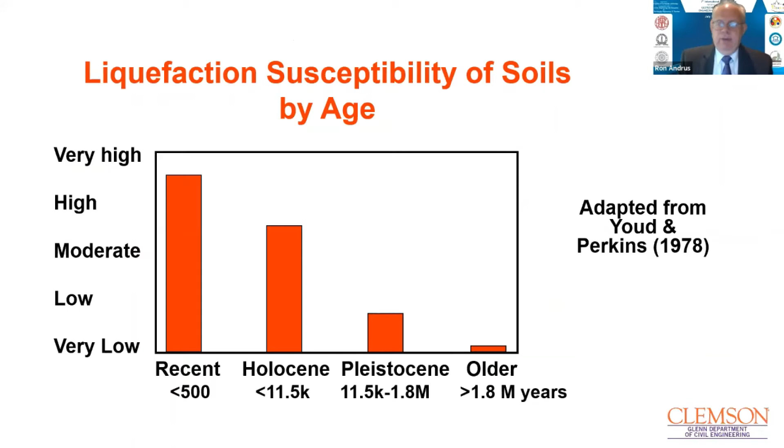But first, I'd like to talk about the aging or diagenesis of sands and just focus on the initial stage, because that is what we generally will encounter when we're talking about liquefaction of Pleistocene or older deposits. The figure I'm showing here I've adapted from Bjørkum, who studied the diagenesis of a Cretaceous sandstone. This is just the initial stage where we have sedimentation, the deposit being formed, and grain-to-grain contacts are initiated. And as we go in this initial stage, we are getting creep occurring at the point contacts of the grains.

The pressures are high, and we will start to get pressure solution at those contacts, followed by precipitation of cement near those contacts. So in this figure, the blackened area near the point contacts is where we're getting cementation. And then as it progresses at those contacts, some of them turn into concave-convex contacts. Factors that are influencing the rate of initial diagenesis include pressure, temperature, and mineral content.

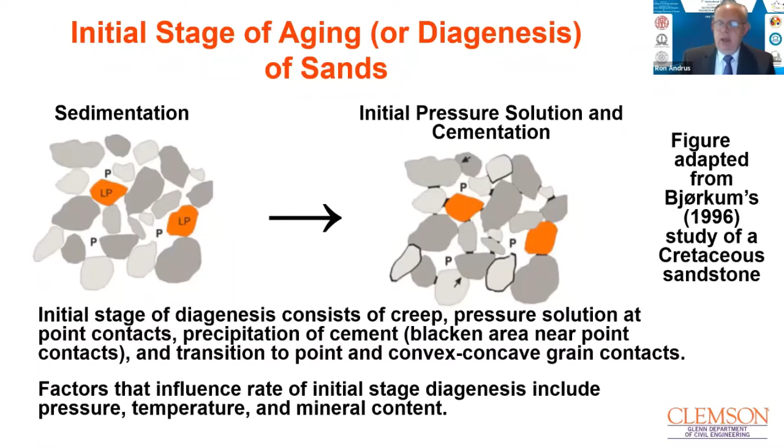Now, what we gain in terms of strength from creep and cementation can be undone by certain events, one being liquefaction. The photograph on the left shows a sand blow or a large sand boil that occurred in a 200,000-year-old beach deposit during the 1886 Charleston, South Carolina earthquake.

Other events that can undo creep and cementation are some construction activities. The photograph on the right is illustrating the installation of a buried pipe that is greatly reworking the soils, and even below the excavated part, the vibrations are weakening the contacts.

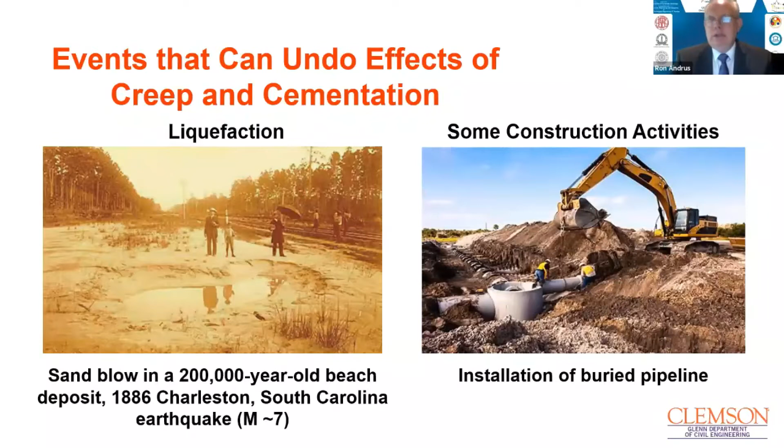Much of our work has focused on the Charleston, South Carolina area, and we see in this slide a geologic map of the greater Charleston area, which shows beach ridges ranging in age from less than 10,000 years to, when we go 40 kilometers inland, over 700,000 years old. Now, during the 1886 Charleston earthquake, there were large sand boils or craterlets or blows, whatever you want to call them, that occurred at many locations within the Pleistocene deposits.

Also mapped are areas where we had horizontal ground displacement. The trace here is the trace of the surface rupture of the fault, and it's actually mostly inferred because it's not well defined. The sediments here in Charleston are 800 meters thick before you get to the basement rock, so by the time it gets to the surface, it's not that well defined. But you can see that, and I'm looking for that cursor again, yeah, most of the ground failures are occurring near the fault.

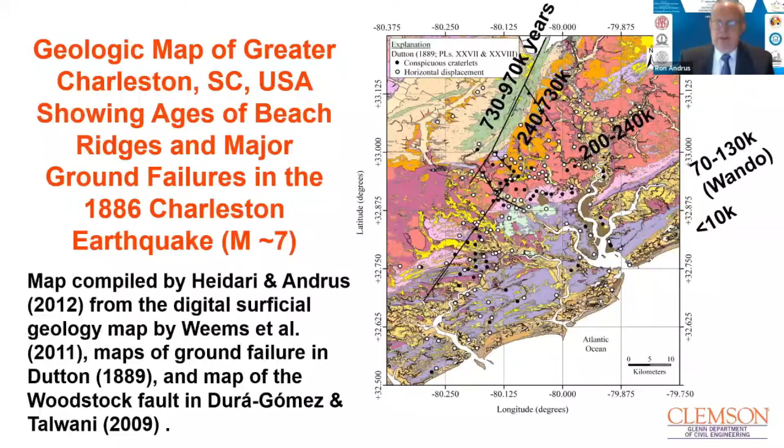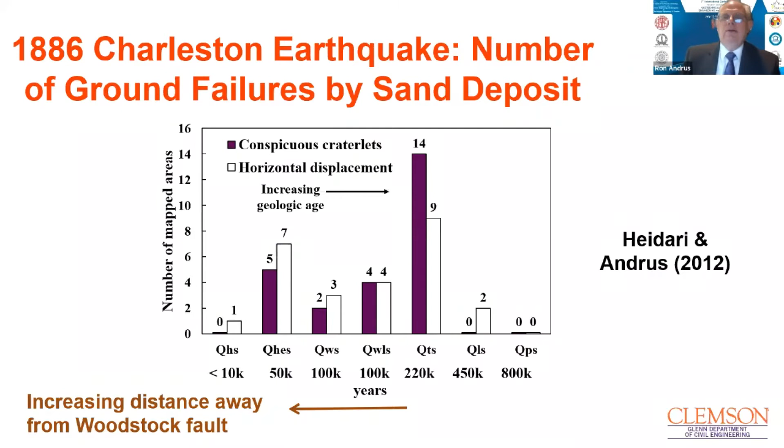The next slide presents a histogram of the number of ground failures in each of the geologic units. This histogram was created by Tihara Heidari, a graduate student here, as part of her dissertation. We see that the largest number of cases are occurring in the 200,000-year-old QTS deposit. And as we move away from the fault, the number is decreasing generally, but still larger in the younger deposits and less in the older deposit. So definitely proximity to the source zone is a factor in liquefying these older deposits.

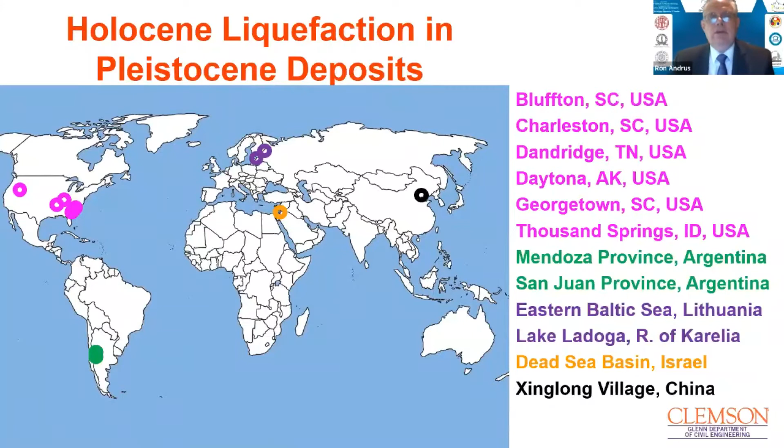South Carolina is not the only place where we have Holocene liquefaction in Pleistocene deposits. Here on the map, we're in South Carolina, but in Arkansas, Tennessee, Idaho, there have been cases of Holocene liquefaction in Pleistocene deposits. Down in South America and up in Europe, the Middle East, and in China, all have reported cases of Holocene liquefaction in Pleistocene deposits.

In terms of quantifying the effects of diagenesis, what we're talking about is we have the CRR from the commonly used charts that have been proposed and are used in practice. But these charts are based on young soil deposits. And so in order to apply them to older soil deposits and to get a correct prediction, we need to apply a diagenesis correction factor, denoted in this presentation as KDR.

There are a number of ways that we can come up with this diagenesis correction. One way is to base it solely on lab tests, where we define KDR as the CRR of the intact, undisturbed specimen divided by the CRR determined from laboratory testing on freshly reconstituted material from the intact. Shown in the figure here are three relationships based on lab tests.

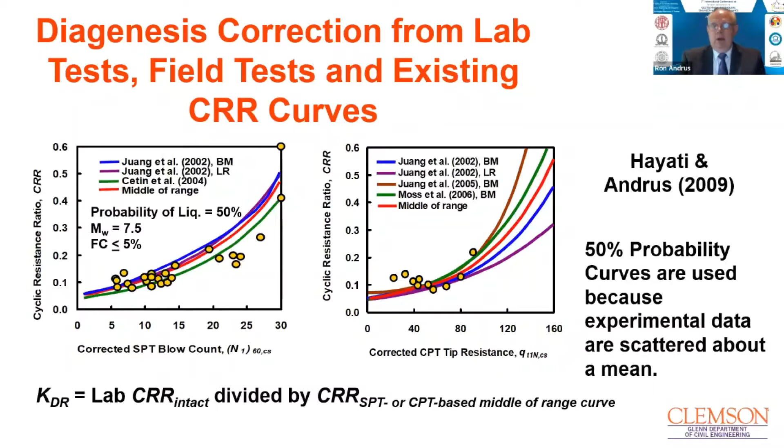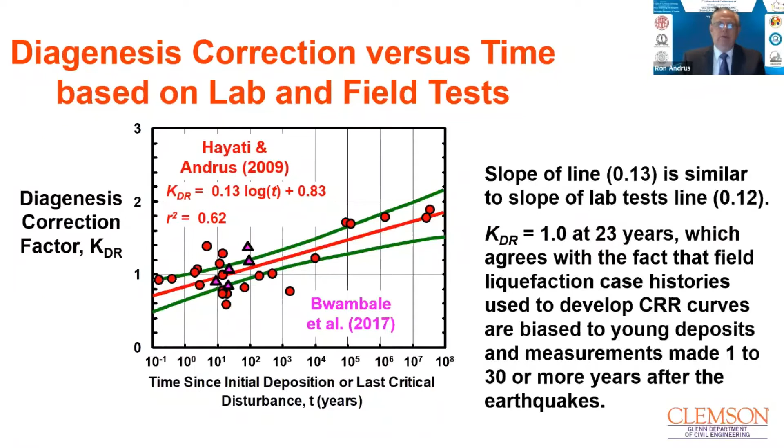The third category of diagenesis correction factors are based on field test and ground behavior observation. There are various approaches within this category. One is to use the liquefaction potential index, another minimum and maximum factor of safety, and a third is to develop new CRR curves. I'm going to highlight each of those three approaches in the following slides.

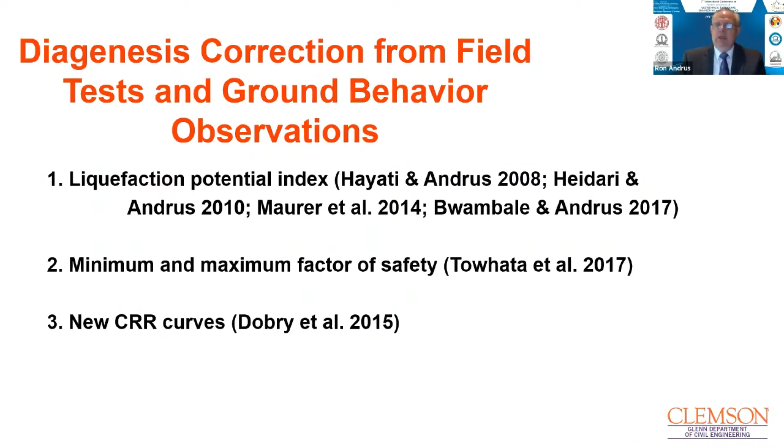And in this example, I'm looking for my cursor again.

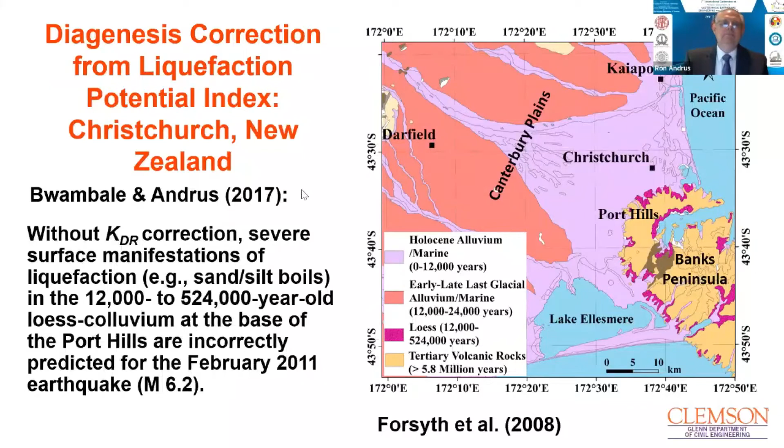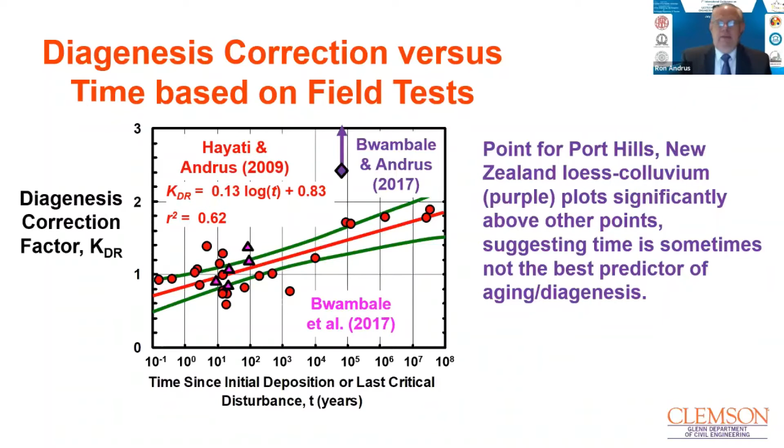When we plot the value of the diagenesis correction for the Port Hills, it plots here. The age range would be in this range right here, but it's well above the data that Hossein Hayati and Barnabas Bwambale compiled for predominantly quartz or silica-based sands. So here's another example of where time is not doing a very good job of being the predictor of the effects of diagenesis.

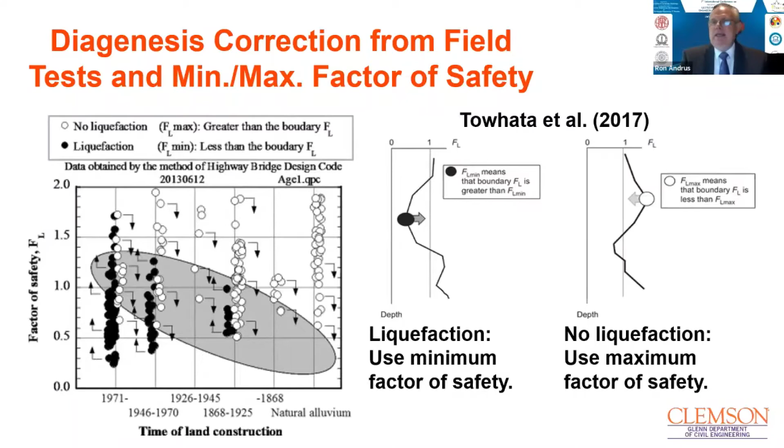Here is a slide summarizing the approach of Towhata and others, where they used minimum and maximum factor of safety. What they did was at the liquefaction sites, they determined what the minimum value of the factor of safety was, and at no liquefaction sites, the maximum. They plotted it on this figure, and it shows that the threshold for surface manifestations of liquefaction, the factor of safety, is decreasing, indicating a strength gain with age.

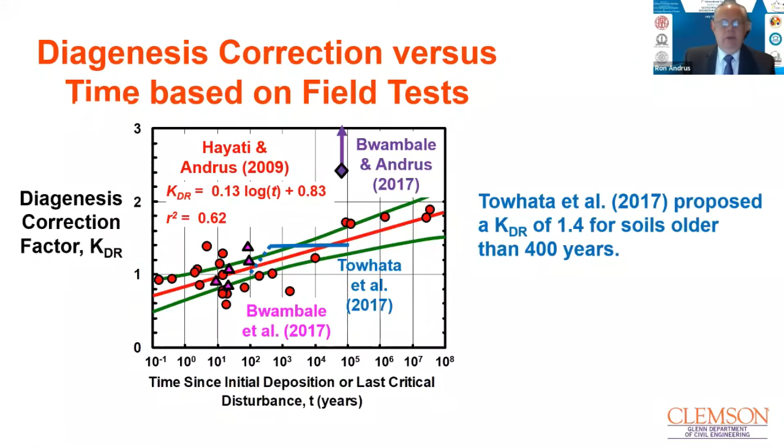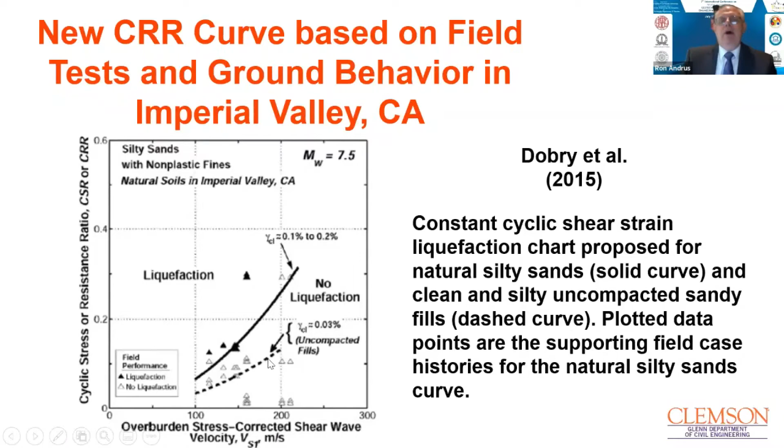Shown here is the proposed value of Towhata and others for the diagenesis correction, 1.4 for soils older than 400 years, which agrees with the data of Hossein Hayati and Barnabas Bwambale. Shown here is a new CRR curve that was proposed by Dobry and others, where they looked at data from the Imperial Valley, California, and they noted that the line separating cases of liquefaction and no liquefaction in the natural sand deposits plotted significantly above the line for uncompacted fills.

As we have noted before, time is not necessarily always the best predictor of the effects of diagenesis. A promising alternative, more robust parameter is the measured to estimated shear wave velocity ratio. And this is a very simple concept. We're going to take the measured shear wave velocity, adjust it for overburden effects to a reference overburden pressure, and then we're going to divide it by an estimated shear wave velocity.

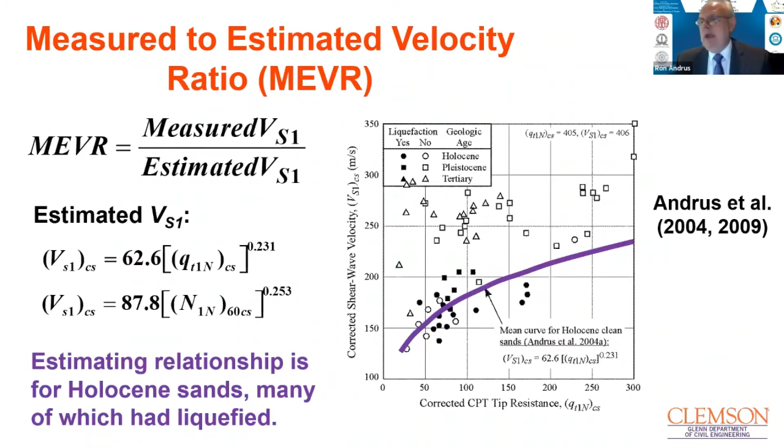And now we've come to other sites and found that in older sites that haven't liquefied, we get much higher values. So in the next slide, we're going to show this same data, but we're going to take the measured shear wave velocity values and divide them by our reference curve here to come up with a plot of MEVR, measured to estimated velocity ratio, versus time. We've been very careful on how we've defined time. It's time since initial deposition or critical disturbance, that is liquefaction.

We can see that there's a strong trend in the data, that MEVR increases with time. We can also see that there's significant scatter in the data, which is likely due to varying degrees of diagenesis within the same deposit. Shown here is the relationship created by Hossein Hayati, where instead of time we're using MEVR as our predictor variable for our diagenesis correction. The R squared here is 0.7 versus the 0.72 here versus the 0.6 something with time.

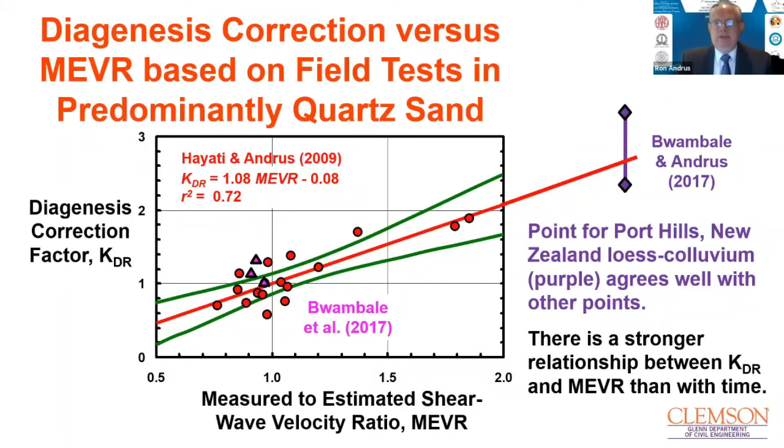And when we look at the Port Hills case history and extrapolate the Hossein Hayati equation, it agrees very well, in fact much better than when we are using time as the predictor variable. There have been other proposed predictor variables for the diagenesis effect: the small strain modulus Gmax by cone tip resistance, that same ratio multiplied by a normalized cone tip resistance, and then that value of KG divided by some estimate or reference KG.

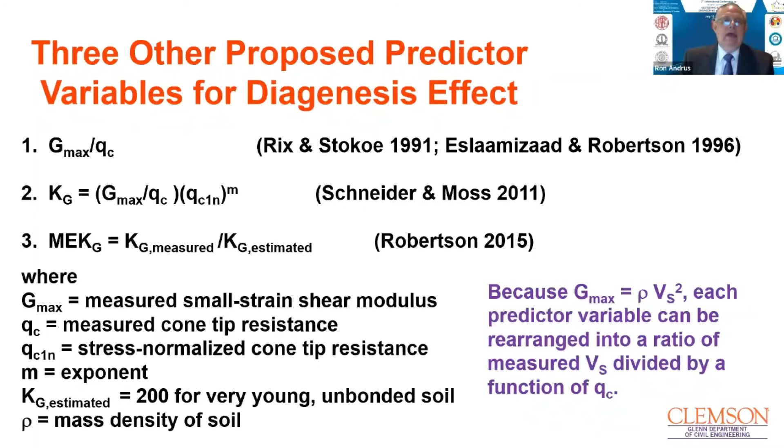Now we can compare these three additional predictors with the MEVR predictor, because shear modulus is directly related to shear wave velocity. Each of these ratios can be rearranged into a ratio of measured velocity divided by the normalizing function of QC. And that is what is being shown here in this plot.

So this right here is our estimated MEVR relationship. This is the reference relationship that's being assumed. And I've lost my cursor again. The Gmax over QC, the KG relationship and the MEKG. We can see that the shapes of those 3 or 4 reference shear wave velocity relationships are different, and because they have different shapes, we should expect their ability to predict the effects of diagenesis to be different.

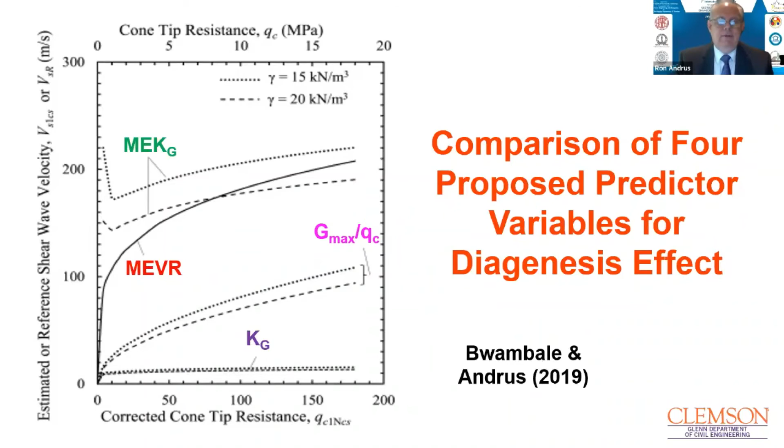Plotted here are two relationships between MEVR and the diagenesis correction factor, and this is based on field tests. So we have the relationship shown in red by Hossein Hayati. And then Barnabas Bwambale reviewed the data compiled by Hossein Hayati. If the data didn't contain a certain set of information, he omitted those data, but he added new data. But in that process of interchanging data, the regression did not change much. His regression line is shown there in purple.

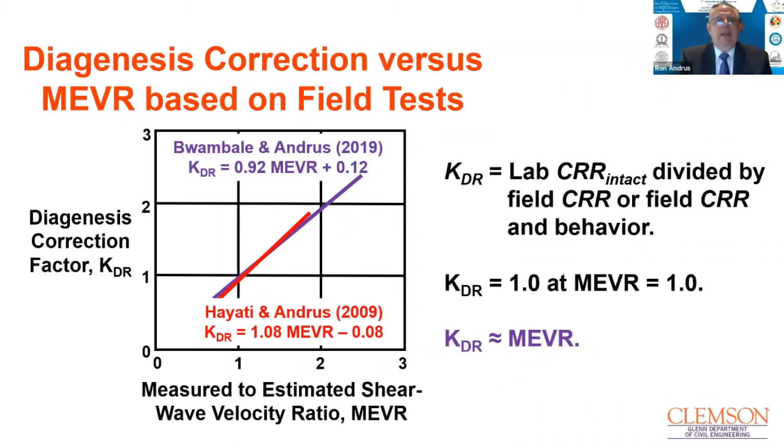Pretty much the bottom line is that the diagenesis correction factor is approximately equal to the MEVR. So when we're calculating MEVR, we're actually approximating that correction factor. In summary, initial aging or diagenesis includes creep, pressure solution, and precipitation of cement. Liquefaction and some construction activities can erase the strength gain from creep and cementation.

Sites of Holocene liquefaction in Pleistocene deposits support the need for assessment in older deposits. Seven proposed relationships exhibit similar rates of strength gain per log cycle of time for silica-based sands. However, tailings and loess colluvium deposits can exhibit significantly greater rates of strength increase. MEVR, or the measured to estimated velocity ratio, is a better predictor of diagenesis effect than time, and MEVR provided the highest R squared and lowest root mean squared of four predictor variables.